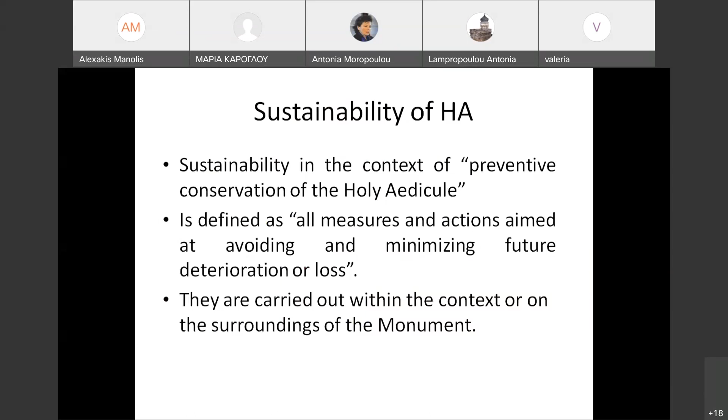Okay, let's move. When we talk about the sustainability of the Holy Aedicule, we have to put it in the context of the preventive conservation of it, which means we have to have in mind all the measures and actions that are needed, aiming to avoid and minimize future deterioration or loss. So all these actions need to be carried out within the context or on the surroundings of the monument.

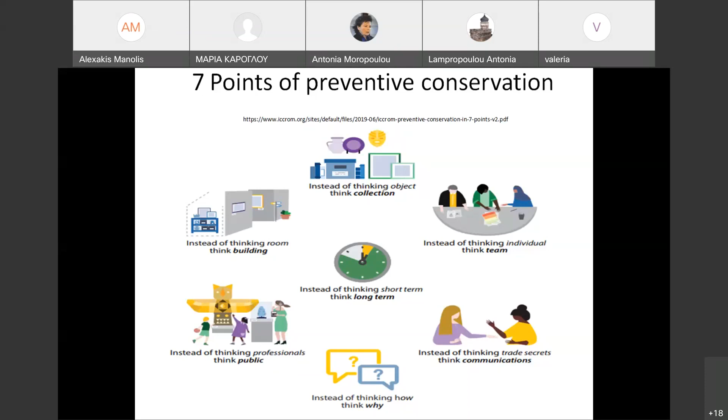There are 7 crucial points of preventive conservation. When we talk about prevention and conservation, we have to keep in mind that we have to think as a member of a group and not individually. We have to think about the whole site of the monument and not only the object. We have to have long-term thinking and not short-term thinking, to communicate all these ideas with the public, and not to think only of the Aedicule, for example, but the whole temple. And instead of thinking how, we should think why we are taking all these actions. So it's very crucial to consider what we need to monitor and why.

Of course, this is where the risk analysis is coming. And when we talk about risk, generally it can be defined as the chance of something happening that will have a negative impact on our objectives. Every time we think about risk, we have to consider both its chance of happening and its expected impact.

There are 3 types of risk occurrence. There are rare events, which occur less often than about once every 100 years, like floods, damaging earthquakes, large fires, etc. We talk about common events that occur many times per century. And we are talking about cumulative processes that can occur continuously or intermittently, like the corrosion of metals or the decay of materials, for example.

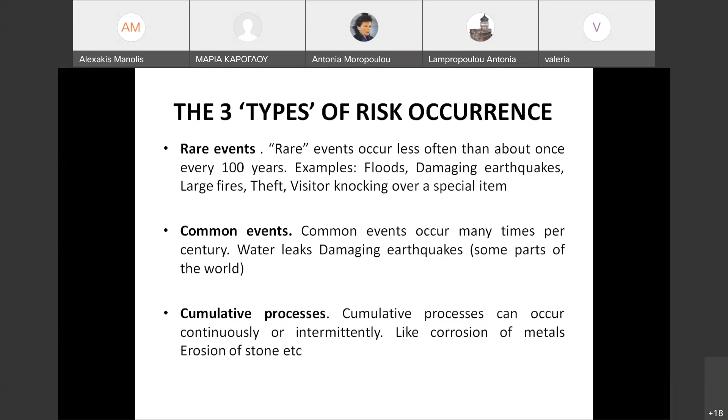So concerning cultural heritage, the main categories of risk in general can be like that: we're talking about climatic conditions, like incorrect relative humidity of the air or incorrect temperature. We're talking about the effect of light and UV, different pollutants, pests, water in all forms, the fire risk, criminals, or physical forces.

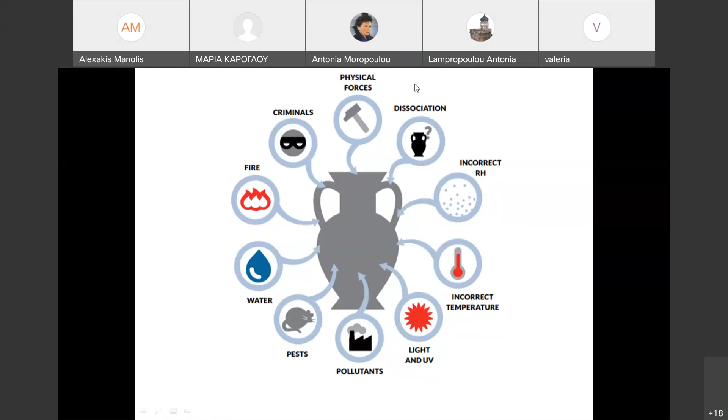The system risk and the monitoring, in the whole risk management cycle, we can see it like the beginning or the end of the cycle. So once our risk treatment plan is implemented and the risk reduction measures are in place, it is important to check regularly how they are performing over time. If necessary, we make changes to improve their results, because risk management is a continual process and we should keep repeating the cycle and stay alert for significant changes that may occur.

This can be changes in the context of the heritage asset or in our value assessments. There is something else we must learn to do at each step of the risk management cycle: document our work carefully.

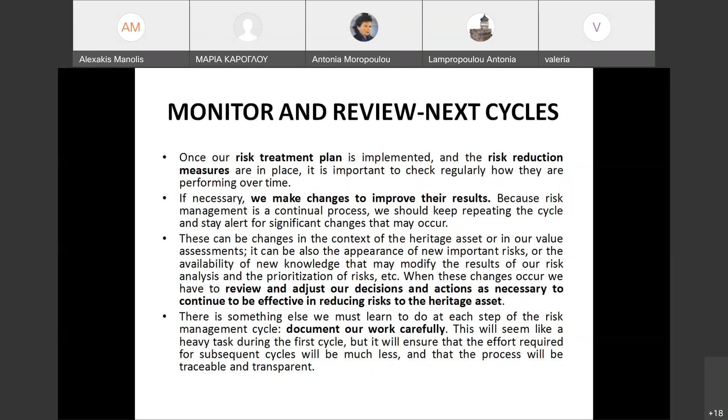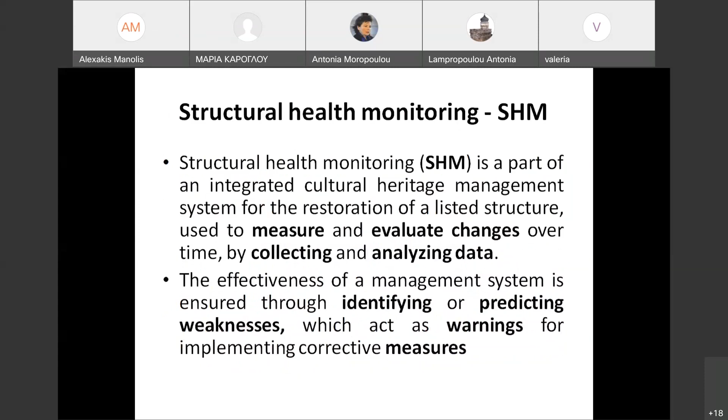So, structural health monitoring is a part of an integrated cultural heritage management system for the restoration of a listed structure, used to measure and evaluate changes over time by collecting and analyzing data. The effectiveness of a management system is ensured through identifying or predicting weaknesses which act as warning for implementing corrective measures.

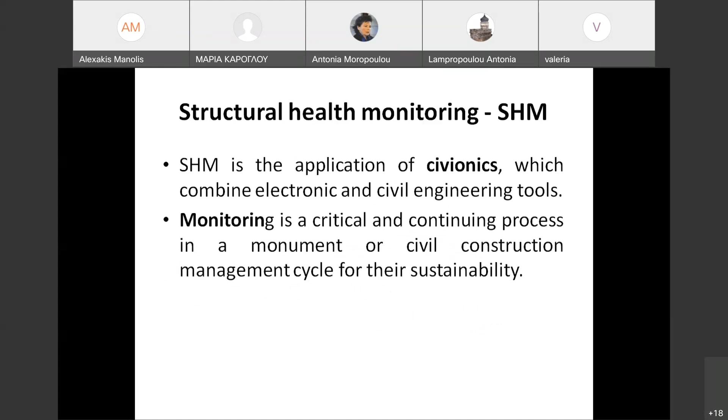A new term is now applied. It's called civionics, which combines electronic and civil engineering tools. Monitoring is a critical and continuing process in a monument or civil construction management cycle for the issue of sustainability.

For structural health monitoring, there are different sensor networks installed on bridges, tunnels, dams, railways, etc., in order to collect spatial and qualitative data on their response. These systems are capable of raising multidimensional alarms and visualizing results in real time with high accuracy.

Data acquisition is continuous and records are transmitted to central servers or clouds for elaboration. Continuous collection of data over several months or years reveals trends in the behavior of the structure and its evolution, helping to ensure its sustainability.

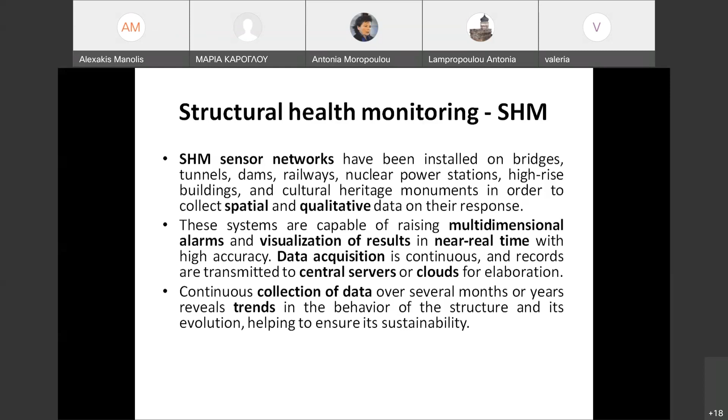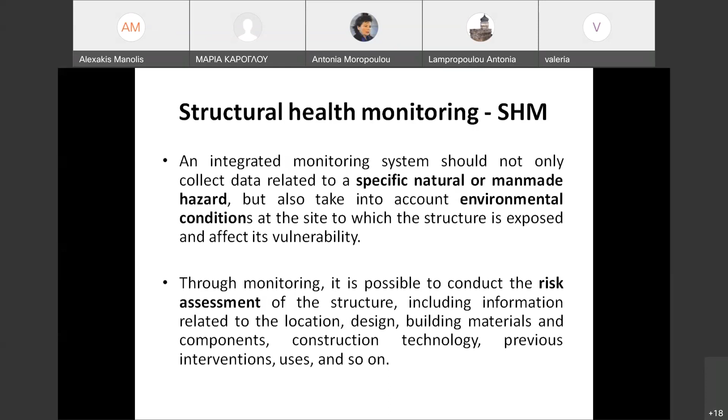An integrated monitoring system should not only collect data related to a specific natural or man-made hazard, but also take into account environmental conditions at the site to which the structure is exposed and that affect its vulnerability. Through monitoring, it's possible to conduct an assessment of the structure, including information related to the location, design, building materials and components, construction technology, previous interventions, uses, and so on.

In the literature, there are different sensor networks applied to monitor cultural heritage structures. Take into consideration that the external environment, such as climate or location, cannot be changed, but the building performance can be modified through suitable actions and operations.

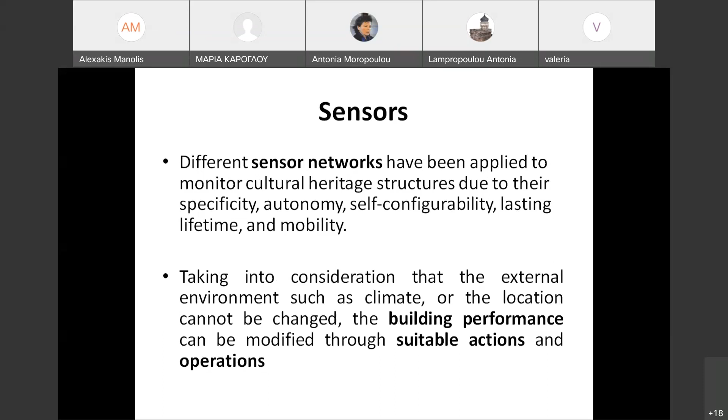Now we'll present the results already published of our work. You can find the exact publication in the Structural Control Health Monitoring Journal concerning the Holy Aedicule.

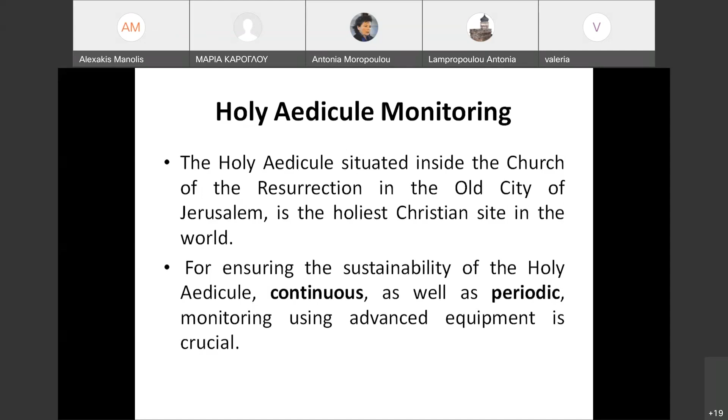I guess until now we have a lot of information concerning the monument itself, so I will not be so explanatory. But it's important to understand that the Holy Aedicule is situated inside the Church of the Resurrection in the old city of Jerusalem. For ensuring the sustainability of the Holy Aedicule, continuous as well as periodic monitoring using advanced equipment is crucial.

Main risks concerning the monument were the seismic risk, the rising damp phenomena, the bigger amount of tourists, and the climatic conditions of Jerusalem.

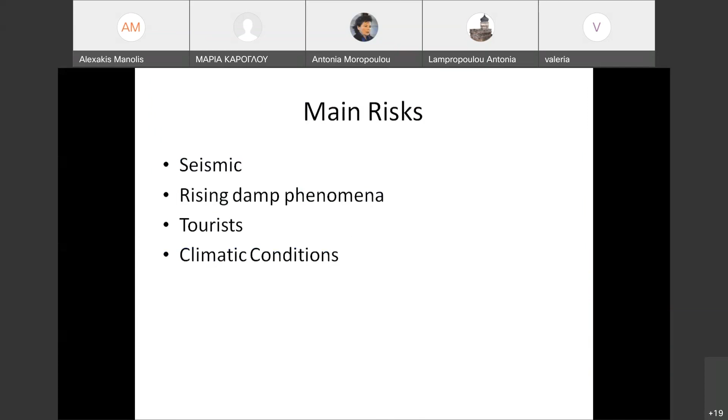So it was decided as permanent monitoring equipment to have special instruments in order to record the changes of air temperature and relative humidity inside the Holy Aedicule, inside the temple of the Holy Sepulchre. Also sensors embedded in the masonry in order to measure the masonry temperature and materials moisture content. For the seismic risk, we installed accelerographs for the earthquake response, and also a station for the spatial position deformation of structural elements.

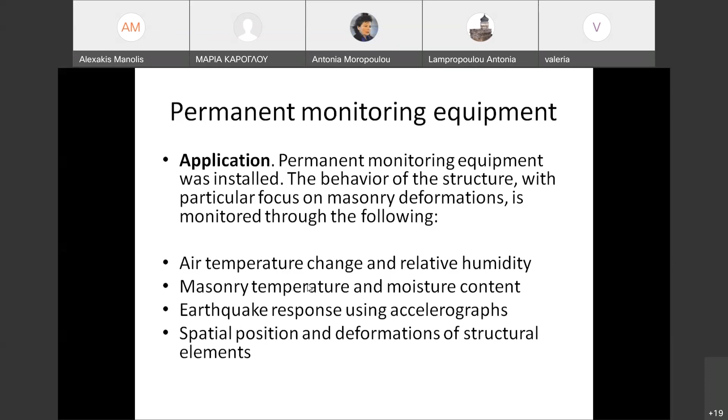Regarding the monitoring of climatic conditions and materials moisture content, we have to say that climatic conditions have the largest and least controllable effect on historic buildings, such as churches, which in many cases have no central heating and cooling system like the Holy Aedicule. So the sustainability of a historic structure and its vulnerability to potential risk is strongly affected by its surrounding environment. This is very important.

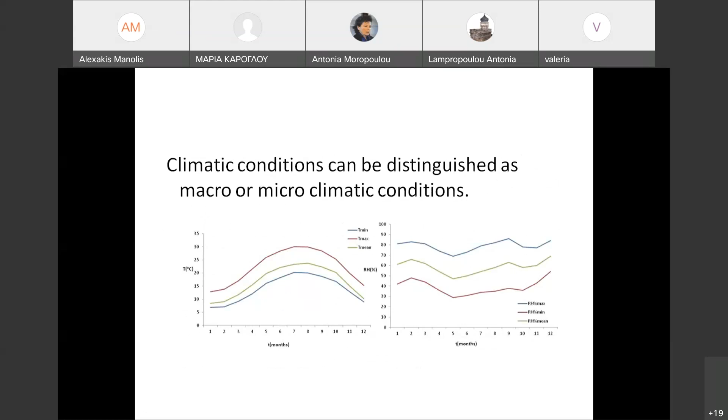So the high level of air relative humidity is a potential hazard to the sustainability of the Holy Aedicule, since several phenomena leading to material deterioration will occur, such as water absorption by hygroscopic salts, high amounts of physical water absorption, development of biodegradation products, etc.

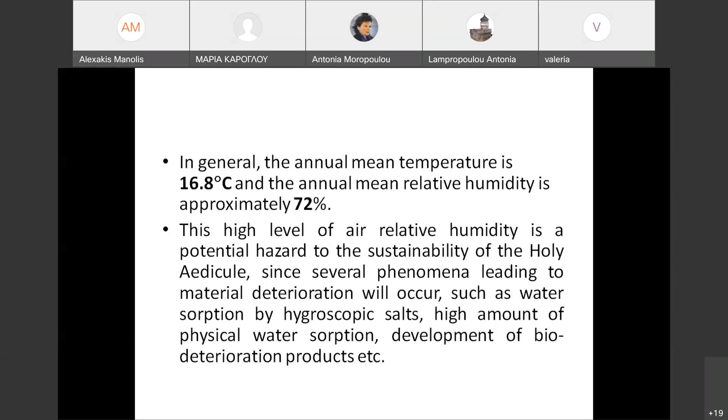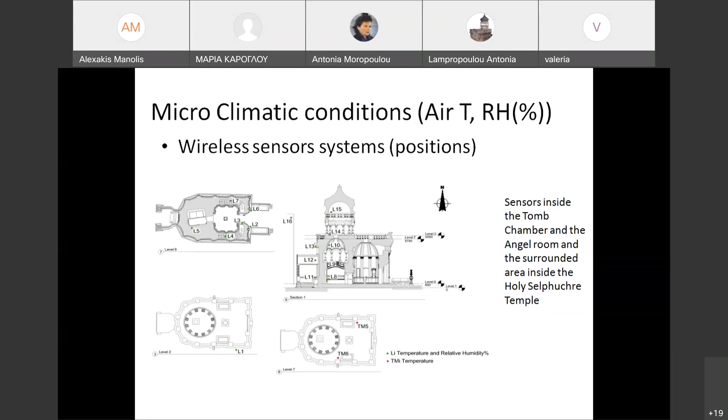In order to record the microclimatic conditions inside the temple, we installed a wireless sensor system. This system consisted of small sensors. You can see here the different positions, and here the sensor itself. We have a total of 16 little sensors that were installed inside the Holy Aedicule, but also in the area around the monument.

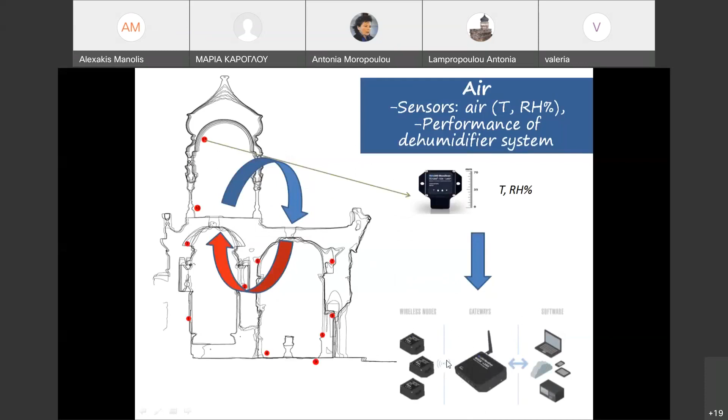This communicates with gateways, and you can have on the cloud, in your laptop, all the relevant values for air relative humidity and temperature. Moreover, we installed a second system concerning the measuring of temperature and moisture, the materials moisture content.

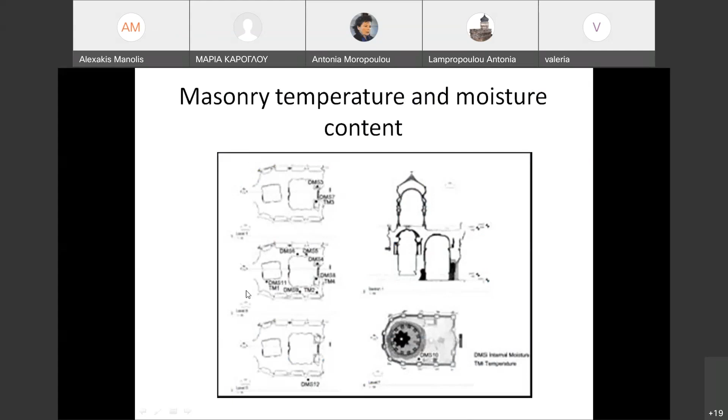This plan is not so good, but we can see the different positions. These sensors are of different types, and you can see that they also have wires. So it's a hybrid system.

The sensors function based on the capacitance of materials. This is called a tape capacitance sensor. It's about 25 centimeters, and you put it inside the masonry. We can see it here in the photograph.

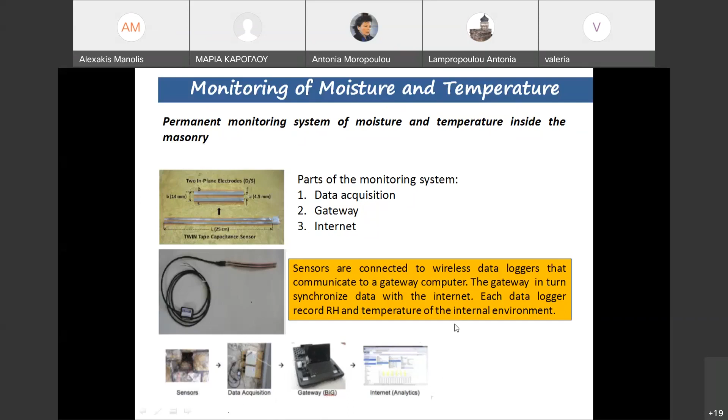So they are connected with data loggers, which record the data per hour, and then we can wirelessly get the data and process it in the cloud in our office. A little about how we actually put it in the masonry.

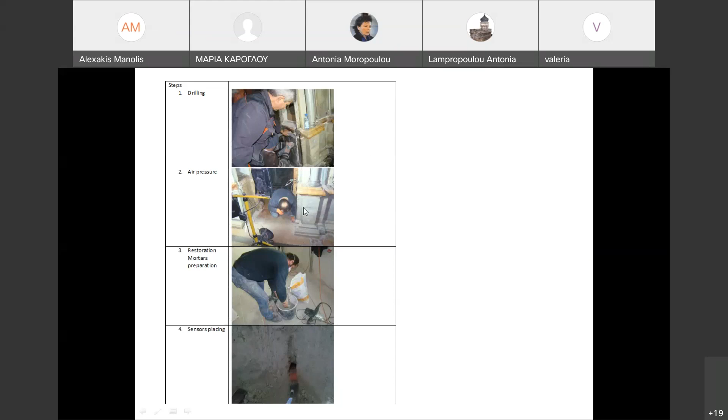During the rehabilitation works, we put the sensor inside the masonry, and we close the specific sensors with the use of mortar. Then we fixed the cables and made all the connections.

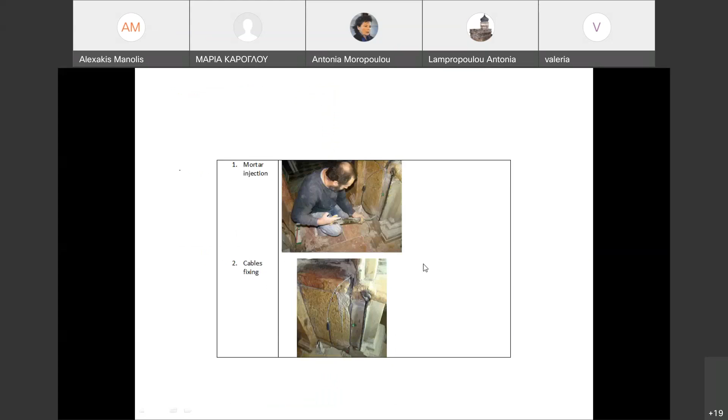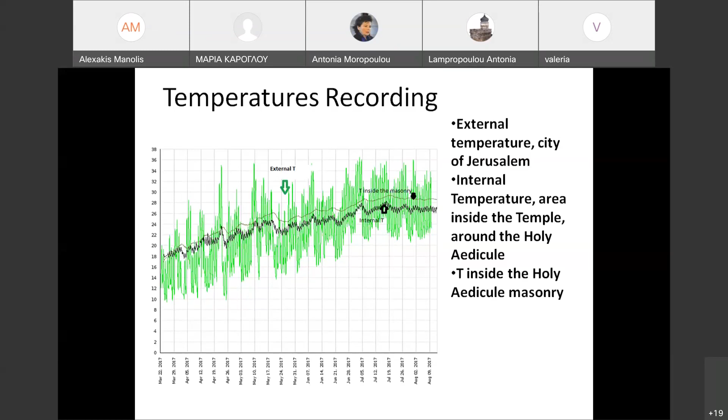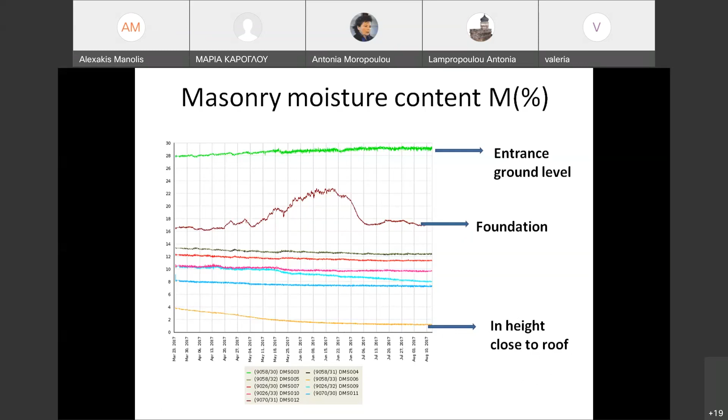The idea was to elaborate all these results from the sensors and to develop a hygrothermal simulator in order to control and manage an acceptable level of safety, sustainable thermal equilibrium, and evaluate the daily, seasonal, and long-term conditions of air, and propose an appropriate operation of the air conditioner system towards a hygienic environment, discover possible risks regarding air conditions, and forecast undesirable and dangerous wall conditions.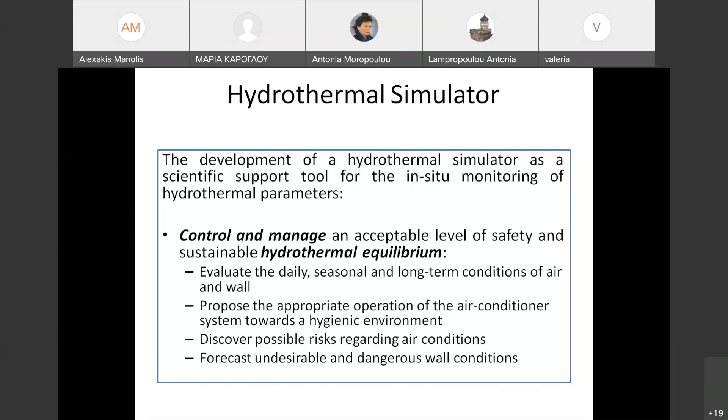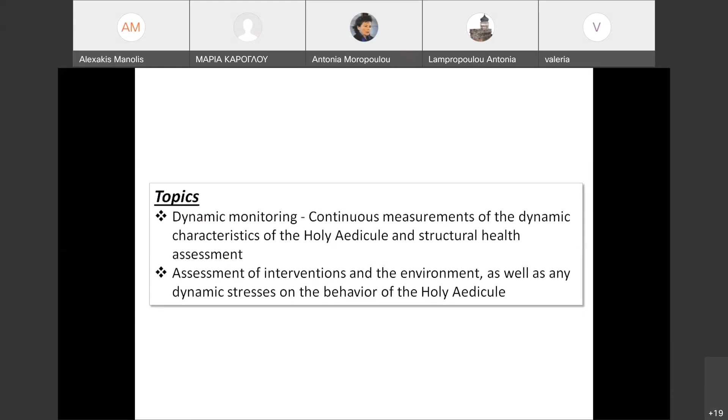Let's pass now to the other system, which is the dynamic monitoring of the Holy Aedicule. This involves continuous measurements of the dynamic characteristics of the structure and structural health assessment, assessment of interventions and the environment, as well as any dynamic stresses on the behavior of the Holy Aedicule. So we have monitoring of system behavior, trends, and continuous dynamic monitoring.

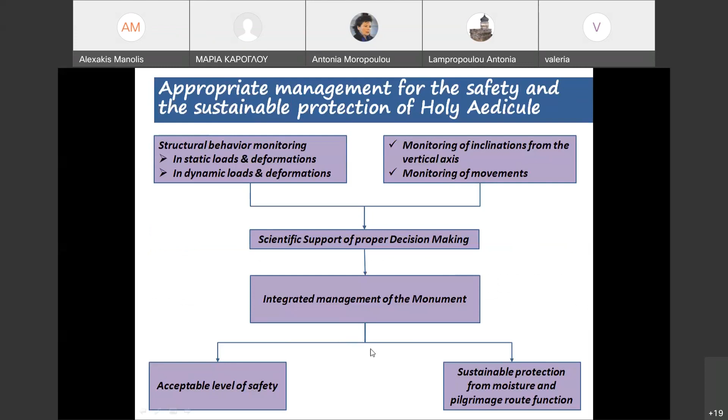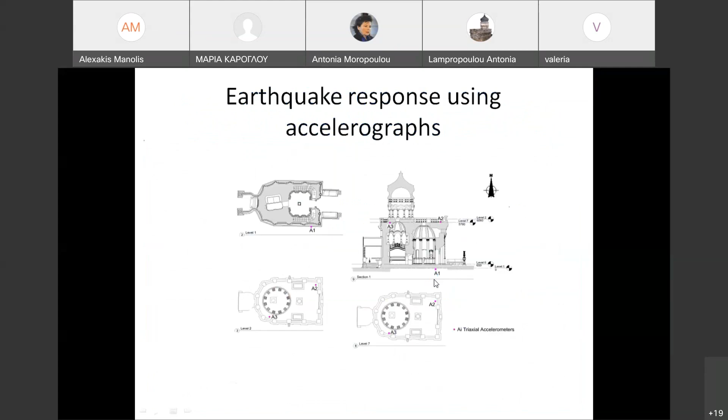For this there were three accelerometers. We can see here the positions that were set on top of the roof of the Holy Aedicule. Two of them were on the roof and the other was on the foundation. These three triaxial accelerometers are installed and connected with the recording unit.

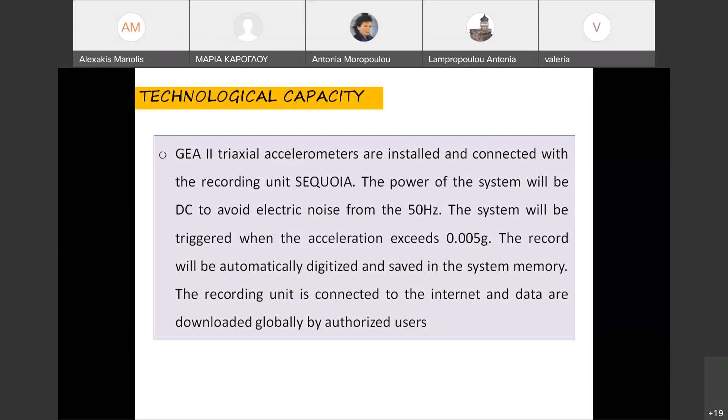The power of the system was DC in order to avoid electric noise from the 50 hertz. Professor Mouzakis can explain further if you need more details about this. The record will be automatically digitized and saved in system memory, and the recording unit is also connected to the internet, so the data can be elaborated by authorized users.

The parameters recorded and analyzed will be the free field acceleration of the rock surface and the absolute acceleration at two locations at the top of the structure. From these two sensors, the translational and rotational acceleration will be calculated, and consequently the translational and rotational natural frequencies will be determined. Data will be analyzed in order to extract natural frequencies and the corresponding natural modes. Changes to the above parameters imply the occurrence of damages.

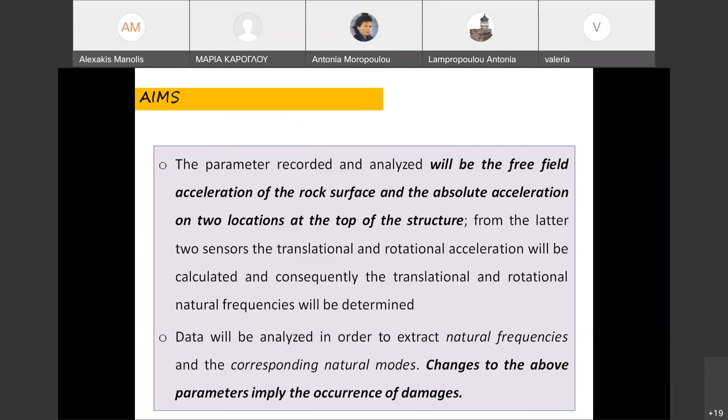The lab accelerometers will be utilized for the installation of an earthquake health monitoring system to record the response of the Aedicule of the Holy Tomb, and will provide data pertaining to the safety and sustainability of the Holy Aedicule. So all this data will be analyzed and correlated with earthquakes in the region and with data from other IDML sensors and instrumentation to provide an integrated understanding of the behavior of the rehabilitated structure.

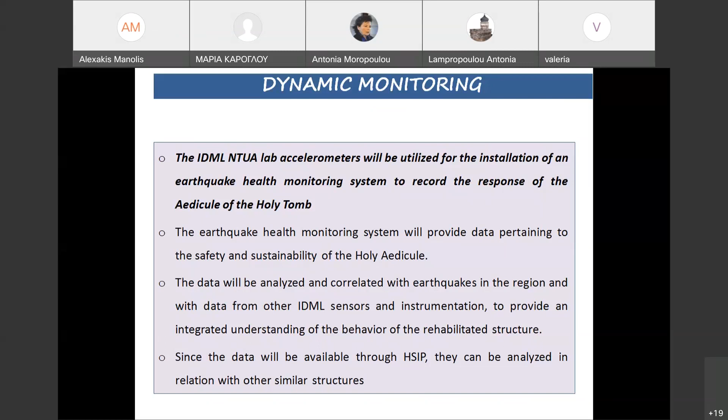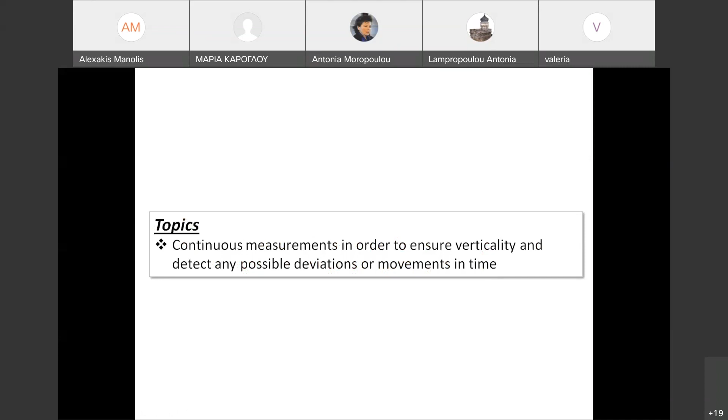Since this data will be available, it can be analyzed in relation with other similar structures. The other permanent equipment used was for monitoring verticality and movements of the Holy Aedicule, aimed to take continuous measurements in order to ensure verticality and detect any possible deviations or movements in time, so as to monitor the inclination from the vertical axis or the monitoring of different movements.

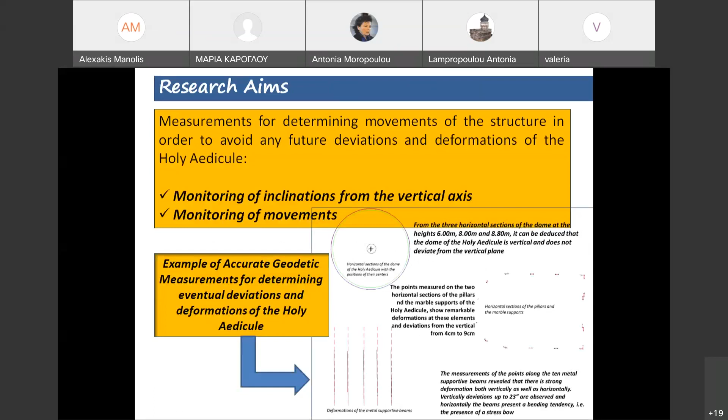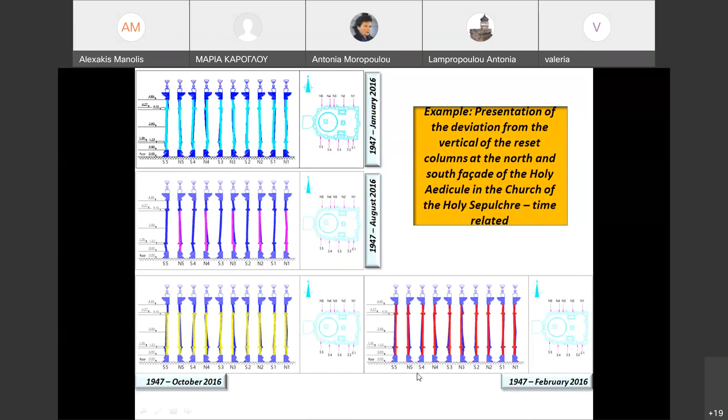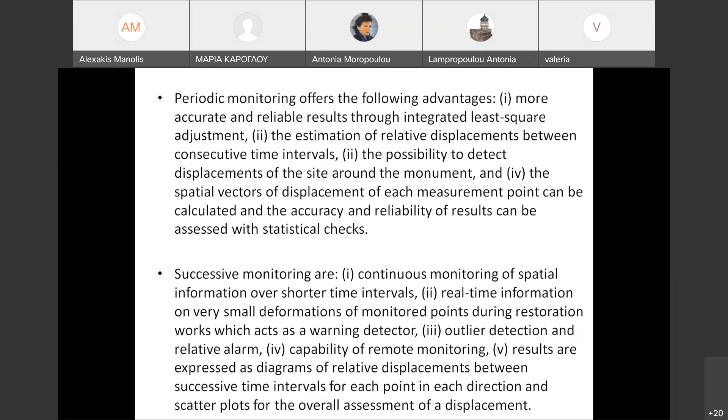For successive monitoring, there is continuous monitoring of spatial information over shorter time intervals, real-time information, and detection of very small deformations of monitor points during restoration works, which act as a warning detector, outlier detection and relative alarm, with capability of remote monitoring. Results are expressed as diagrams of relative displacements between successive time intervals for each point in each direction, and scatter plots for the overall assessment of displacement.

This is Professor Pantazis. If you need further information about the system, you should get in contact with him.

So this is the total station. The geodetic network is set up and fully functioning, and consists of 13 points. It monitors the structural deviation of the Holy Aedicule, automatically transferring all data to the geophoto lab for better analysis.

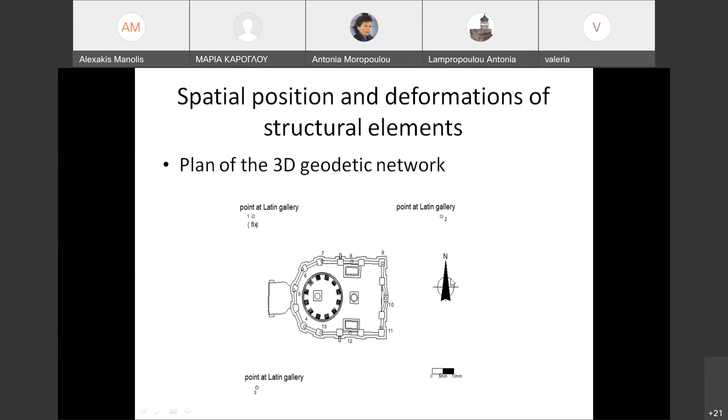This is the plan of the 3D geodetic network. The positions were decided in order to determine the spatial position deformation of the structural elements.

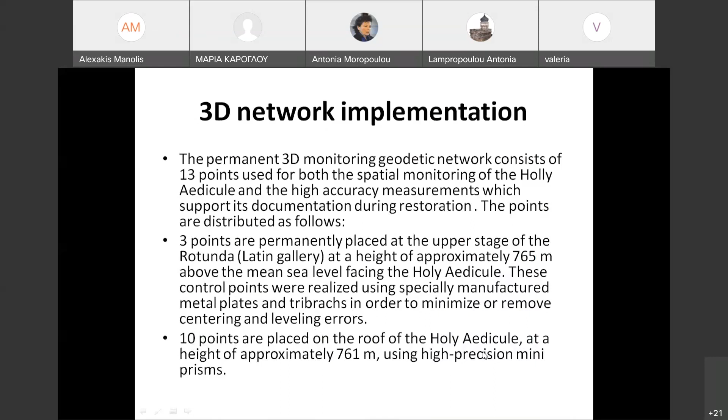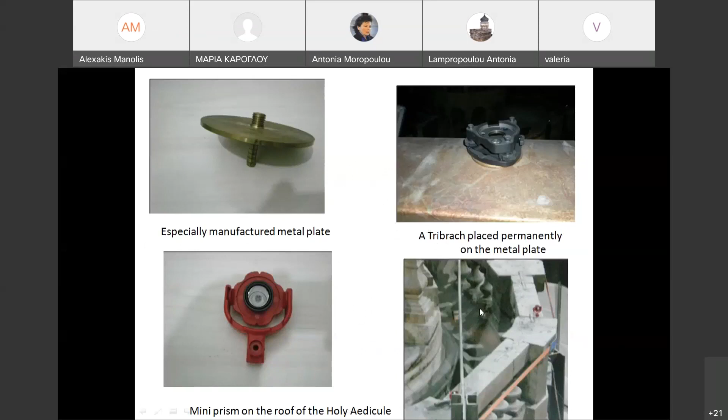We can see here what the tribrach looks like, with a specially manufactured metal plate, and the mini prism on the roof of the Holy Aedicule. These are the 10 points, and here you can see how they are positioned on the monument.

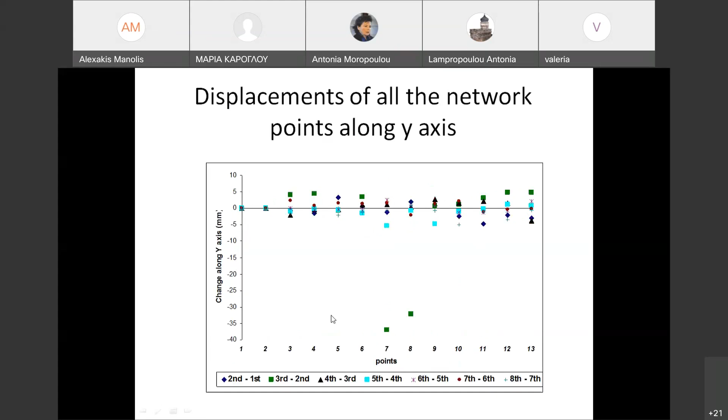So we have different diagrams presenting the changes of all the points' positions along the X, Y, and Z axes. We can see the displacements along the X axis, or the displacements along Y or Z axis, for the different points — 13 points. This shows the displacements of all the network points along, for example, the Y axis, giving us an idea of the movement and the direction of movement of the monument.

Concluding, we can say that the structural health monitoring of the Holy Aedicule includes continuous and specific interval measurements of crucial indicators to ensure the sustainable protection of this unique monument. The monitoring plan, developed by an interdisciplinary team, provides the capability to take structural measures in case of changes to these indicators. The installation of innovative equipment records the response to various hazards, such as thermohygrometric cycles, underground moisture, seismic activity, displacements, and deformation due to settlement or shrinkage. A series of alarms and an awareness system is in place to inform the Christian communities responsible for the management of the Aedicule and its visitors.